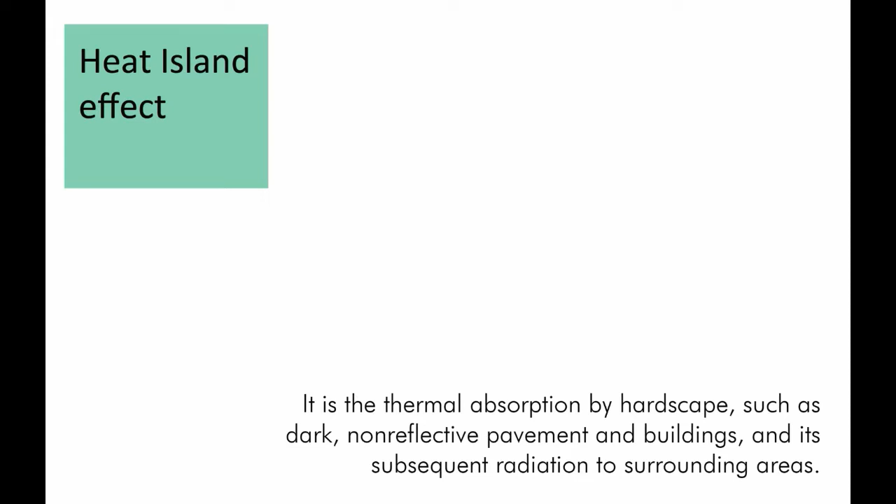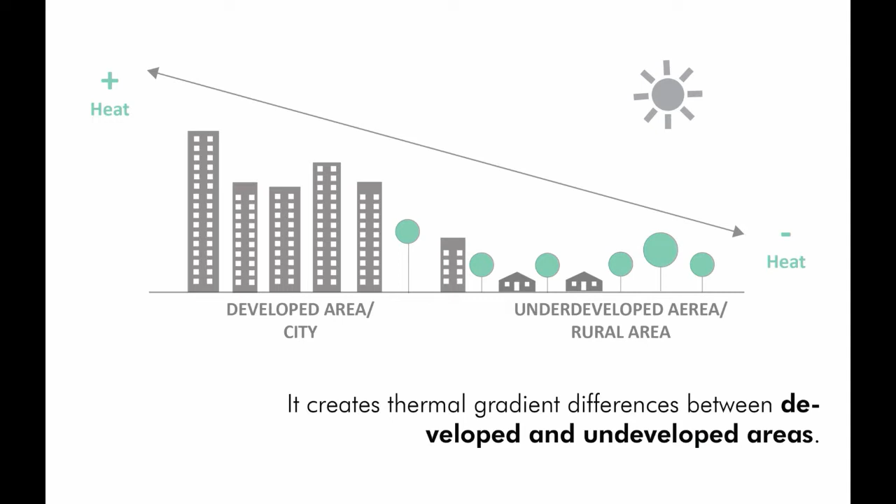Let's start with the definition of heat island effect. It is the thermal absorption by hardscape such as dark, non-reflective pavement and buildings and its subsequent radiation to surrounding areas. As we can see in the picture, urban areas are warmer than rural areas due to the absence of green spaces. This is why there is a thermal gradient difference between developed and underdeveloped areas.

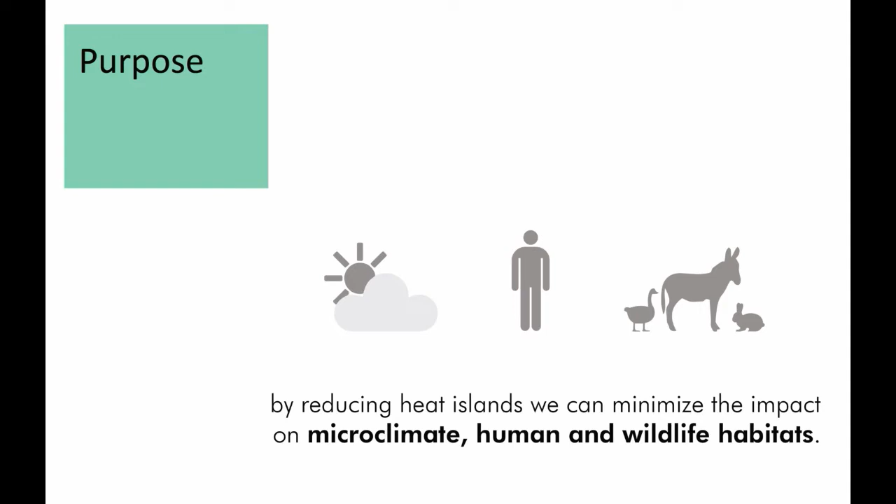So, what is the purpose of this LEED credit? By reducing these differences, we can minimize the impact on microclimate, human, and wildlife habitats. This heat island may contribute to regional average warming trends.

Urban heat island effects have many negative consequences. First, plants and animals sensitive to temperature fluctuations may find habitat inhospitable. Second, human health may suffer because exposure to ground-level pollution is often worse in places affected by heat islands.

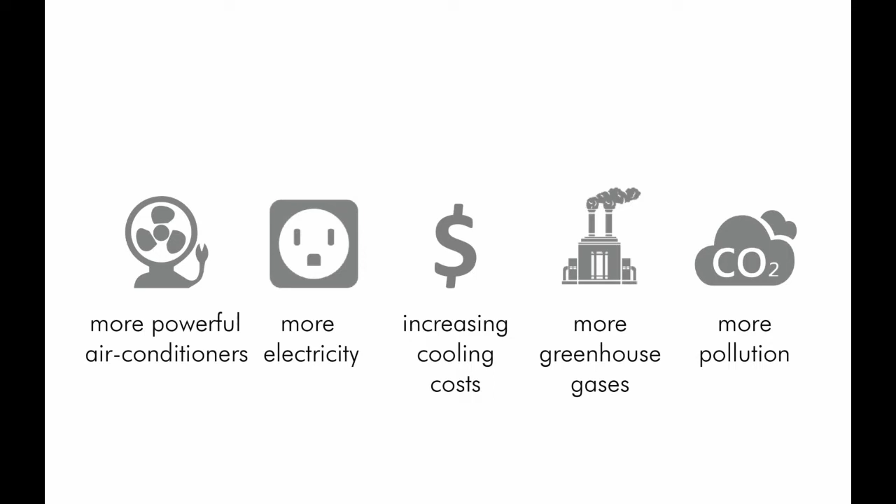Heat islands increase cooling loads in the summer, necessitating larger, more powerful air conditioners that use more electricity, in turn increasing cooling costs, producing more greenhouse gases, and generating more pollution.

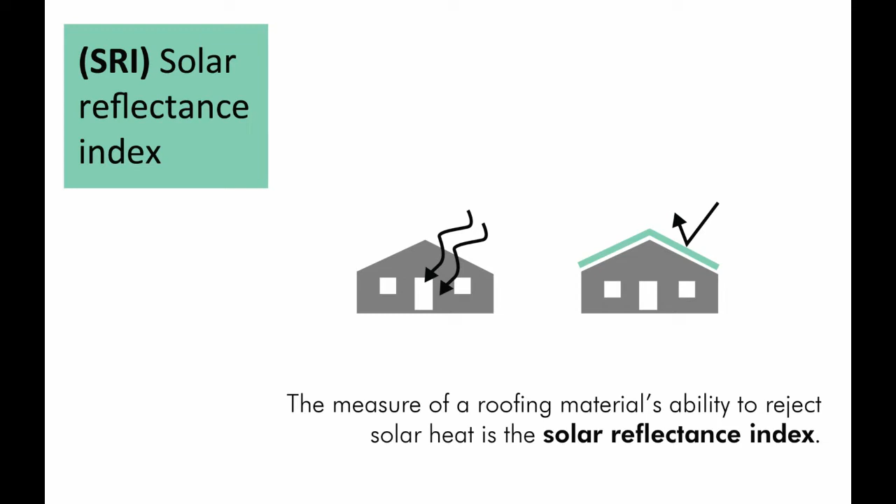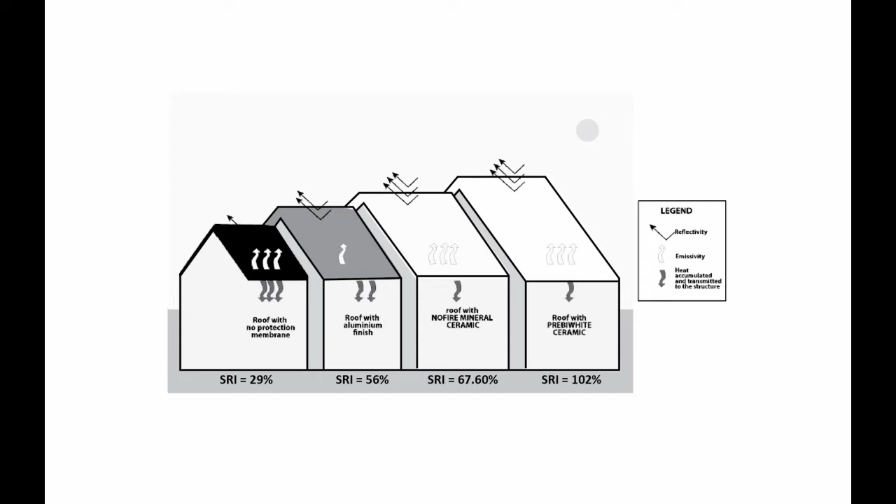SRI is another terminology that should be defined. A roofing material's ability to reject solar heat is the Solar Reflectance Index. In this table, we can see SRI values of different materials. As you can see in this picture, the dark roof with no protection has the lowest SRI value, while the roof with white ceramic has the highest SRI value because white color reflects more light.

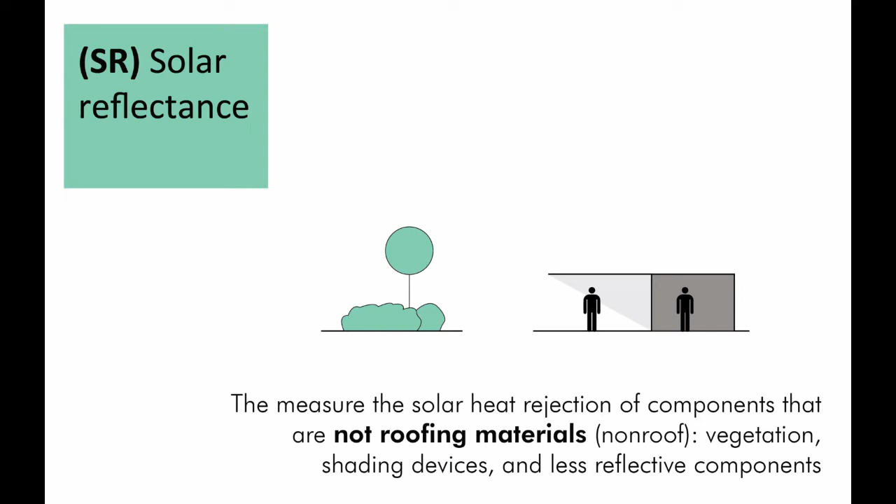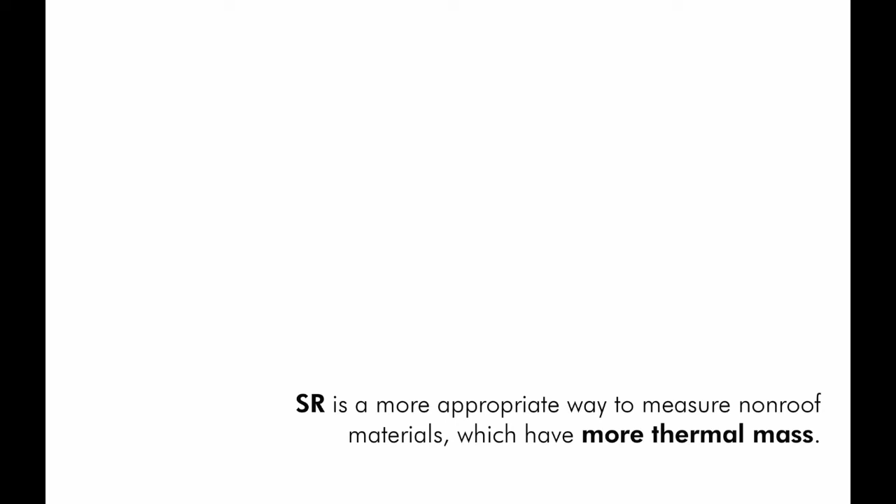Solar reflectance, or SR, is used to measure the solar heat rejection of components that are not roofing materials, or non-roof. For example, vegetation, shading devices, and other less reflective components. SR is a more appropriate way to measure non-roof materials, which have more thermal mass. It should be mentioned that both SR and SRI are calculated according to ASTM standards.

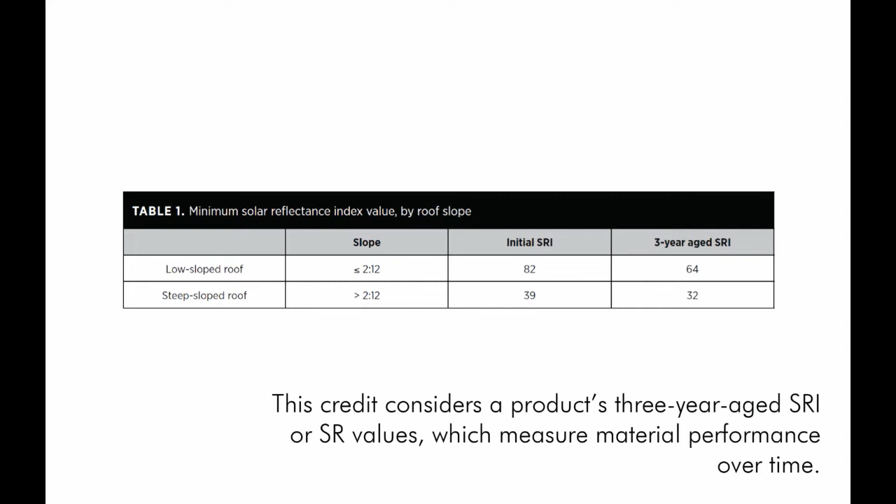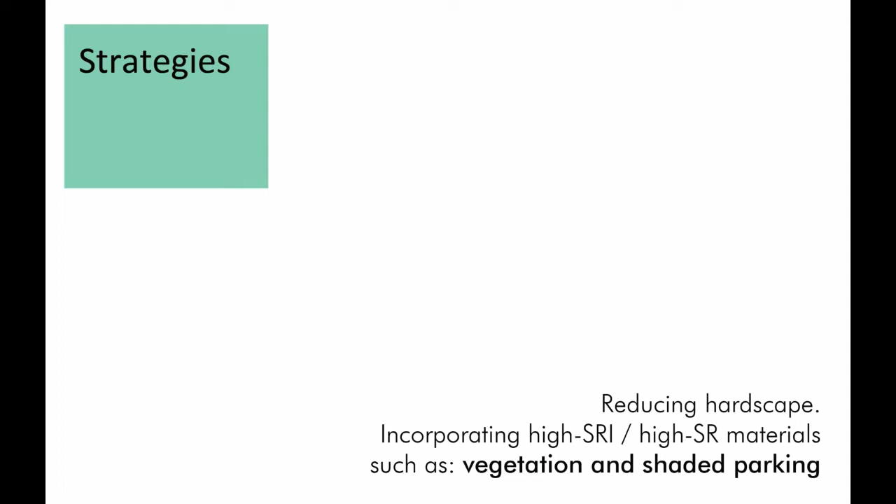This credit considers a product's 3-year aged SR or SRI values, which measure materials' performance over time. The credit encourages project teams to adopt a variety of strategies, including reducing hardscape and incorporating high SRI or high SR materials such as vegetation and shaded parking, which minimize a project's overall contribution to heat island effects. Hardscape includes all paved roads, sidewalks, courtyards, and parking lots.

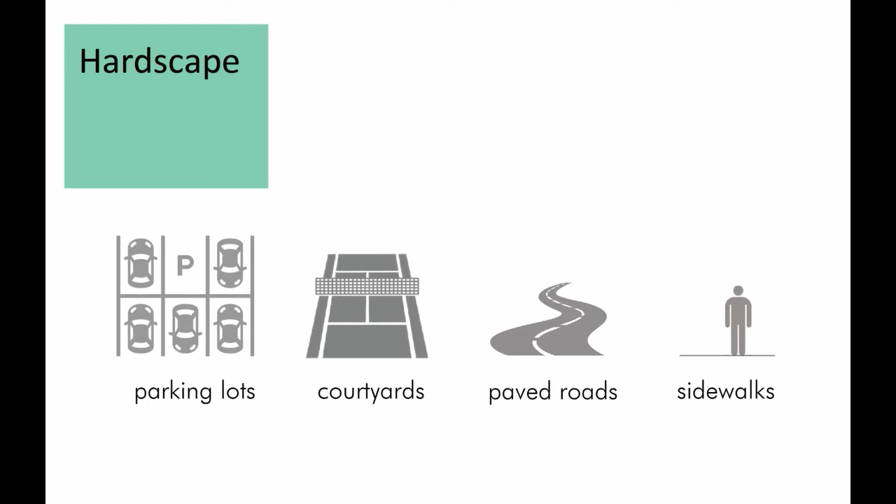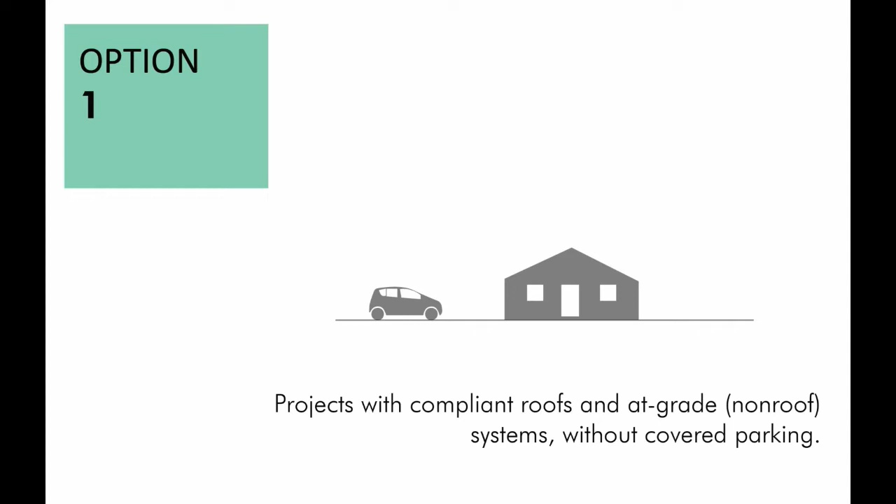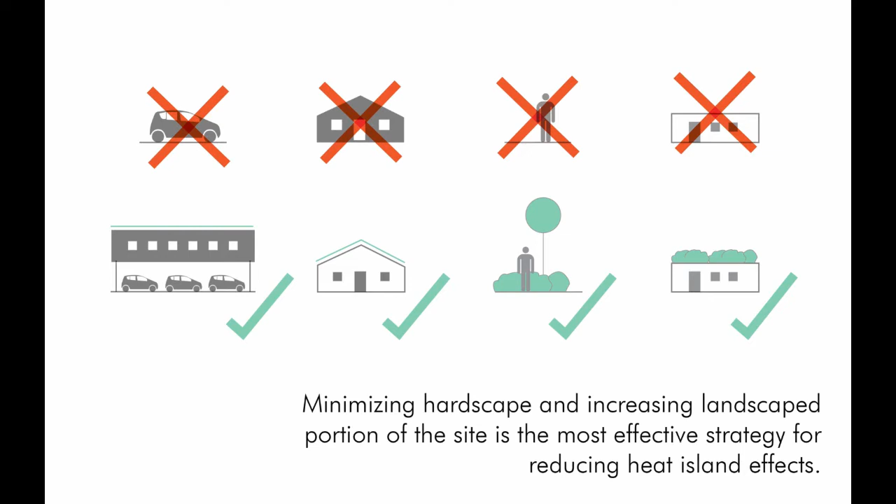For achieving this credit, there are two options. Option 1 is for projects with compliant roofs and at-grade systems without covered parking. It should be mentioned that minimizing hardscape and increasing the landscape portion of the site is the most effective strategy for reducing heat island effects. Roofing material selection is typically the most economical way to mitigate heat island effect.

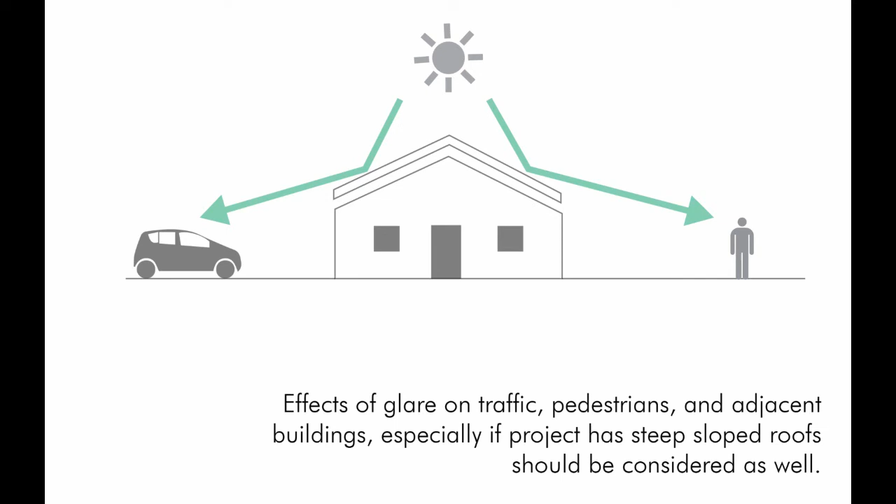We should consider how roof surfaces will be maintained. For example, regular cleaning will be needed to maintain the reflectivity of high SRI surfaces. Effects of glare on traffic, pedestrians, and adjacent buildings, especially if the project has steep, sloped roofs, should be considered as well. There are two equations associated with option 1.

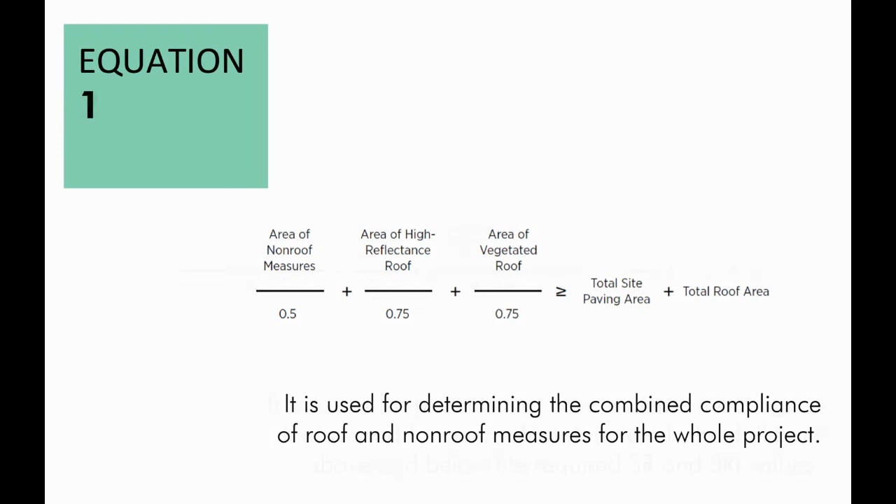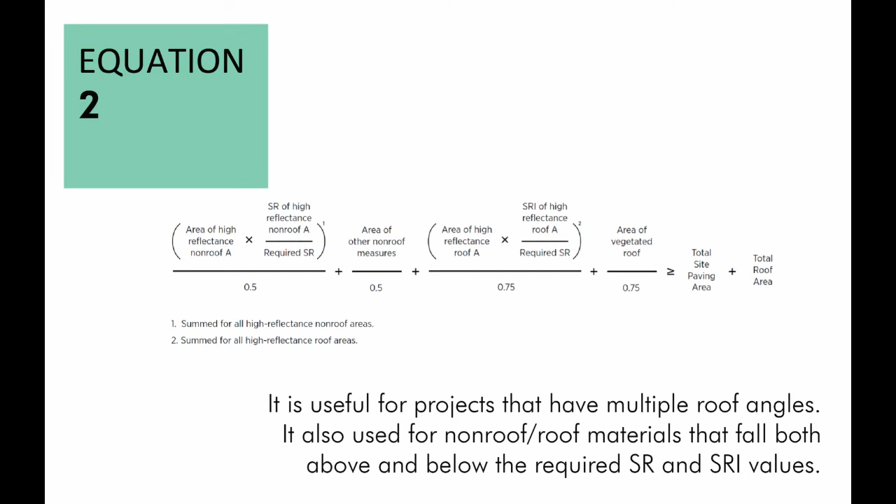The first one is used for determining the combined compliance of roof and non-roof measures for the whole project. Equation 2 is useful for projects that have multiple roof angles. It is also used for non-roof or roof materials that fall both above and below the required SR and SRI values. In the calculation of applicable roof area, we should exclude roof area covered by mechanical equipment, solar energy panels, skylights, and any other appurtenances.

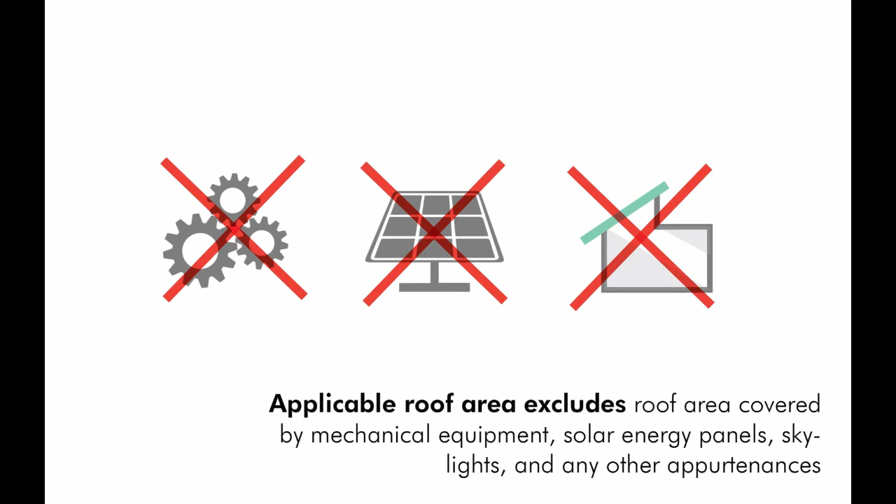Option 2 is for projects with only covered or underground parking. Here some tips should be mentioned. Calculate the number of parking spaces within the LEED project boundary. It is important to know that bicycle parking spaces cannot be counted. At least 75% of parking spaces have to be located under cover.

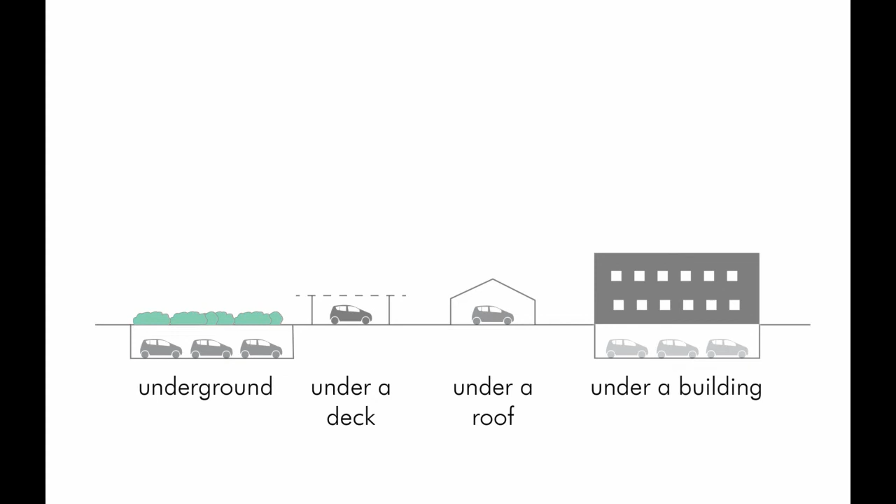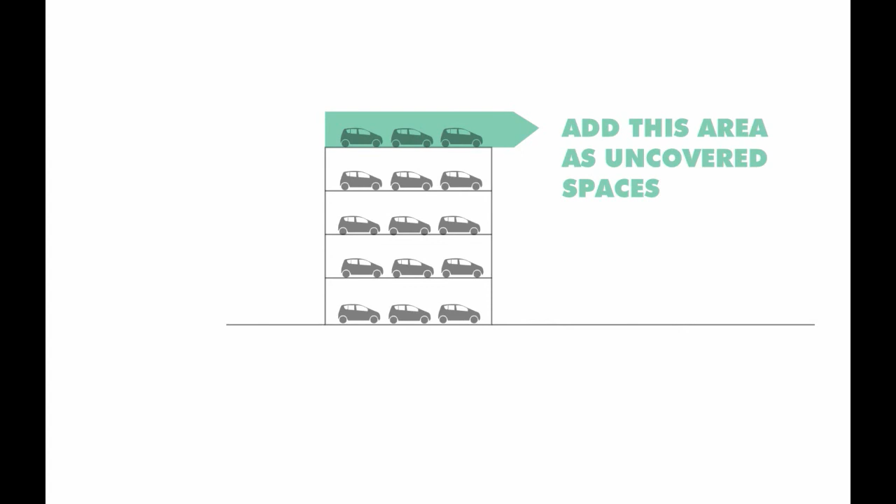If possible, locate parking spaces underground, under a deck, under a roof, or under a building. Count uncovered parking at the top level of a multi-level parking structure as uncovered spaces in the credit calculations. Ensure that the roof over the parking area meets the credit requirements for eligible types of parking cover.

We have found some LEED GA questions related to this topic that can be helpful. First one. What will a project team use to compare different products' abilities to reject solar heat? The possible options are emissivity, perviousness, solar reflectance index, or albedo. The answer is solar reflectance index.

The second question is, which of the following does not help reduce the non-roof heat island effect? Placing parking under cover, increasing the number of above-ground parking spaces, planting large non-native trees for shading, using paving materials with high SRI values. The answer is increasing the number of above-ground parking spaces.